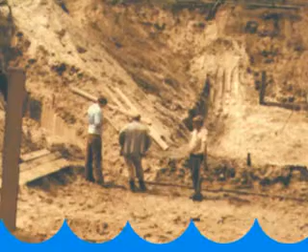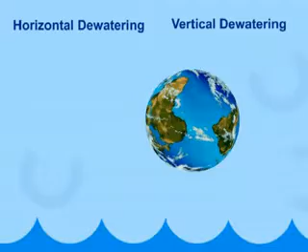At the end of the 70s, plans were made for constructing a workshop and an office on an industrial estate. This was the beginning of the international development of the Koop Group. Nowadays, the Koop Group is the specialist in Europe in horizontal dewatering, vertical dewatering, deep wells, environmental projects and pump

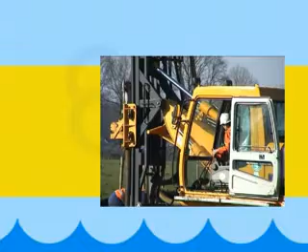installations. With the most up-to-date equipment and materials, the employment and coaching of professional specialists and continuous improvements by training, Koop has become a specialist in the complex area of dewatering and groundwater treatment.

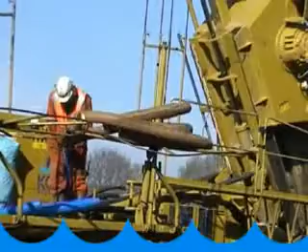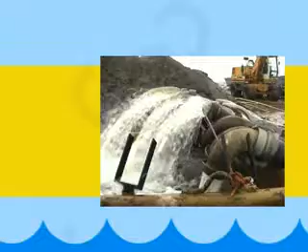Besides the professional aspects of the business, the Koop Group finds the safety, security, environmental and quality aspects very important. All activities are carried out with care and meet all possible environmental requirements. Therefore, the employees only work with the most modern techniques and the most safe equipment. The Koop Group in the Netherlands and Germany has international certificates such as ISO 9002, VCA and TUV.

The Koop Group operates in a number of countries, such as the Netherlands, Belgium, Germany, France, Turkey, Thailand, Sweden, Great Britain and Saudi Arabia. The Koop Group has several subsidiaries in the Netherlands and in Germany. The activities of the Koop Group are horizontal dewatering, vertical dewatering, deep wells, environmental projects and pump installations. Let's take a closer view.

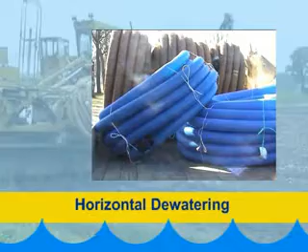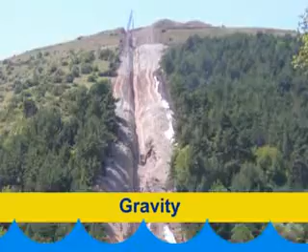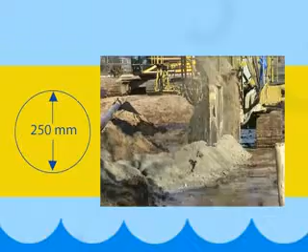Horizontal dewatering is an activity by which the water is extracted through drains. The extraction of groundwater can take place by gravity or vacuum. This dewatering method is mainly used for pipeline projects, or in the case of dewatering large areas. With the use of a drainage machine, Koop can realise multiple cable trenching, and it is possible to install flexible PE pipes up to a diameter of 250 millimetres. At the same time, the trench can be refilled with sand or gravel.

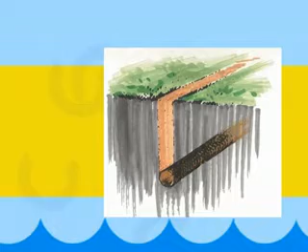The installation of cables and pipes in the trench is monitored by laser and can be placed at a depth of 8 metres below ground level. The drains are connected to a collector pipe underground, which ends in the pumping shaft. With specific adaptations to the drainage machine, Koop is able to install a vertical screen of geotextile into the ground up to a depth of 5 to 7 metres.

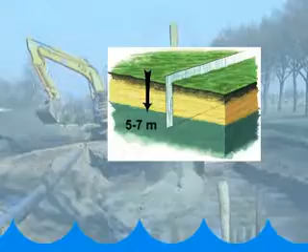The advantages of gravity dewatering are reduction of groundwater flow by 20 to 30%, reduction of costs for maintenance by 50%, reduction of costs for power supply by 50%.

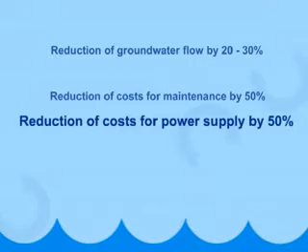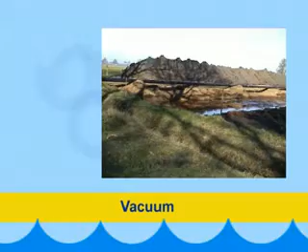Another possibility of horizontal dewatering is vacuum dewatering by means of drains. This system is mainly used for the construction of sewerage systems and for pipelines as well as projects for dewatering large areas. The installed drains are directly connected to the pumps. The advantage of this system is that there are no obstacles above ground on the construction site, and therefore there is no risk of damaging the dewatering system.

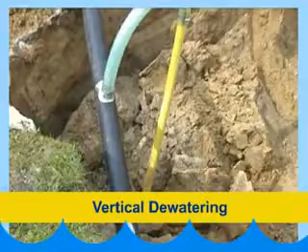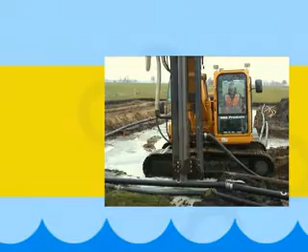Like horizontal dewatering, vertical dewatering can take place by using two filter systems, namely gravity filter systems and vacuum filters. Gravity filter systems are filters in which the water flows into the filters only by gravitation. With the use of drilling rigs equipped with flushing tools or hollow auger drills, 9 to 10 metres long, filters can be installed vertically or at an angle.

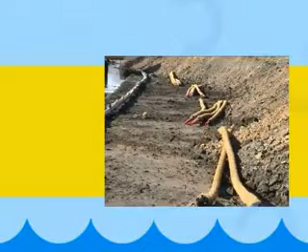The filter consists of a PVC drain protected by a coconut fibre. In this drain, a PVC tube is installed, which is connected above ground to the conduit pipes of the vacuum pump. Another system of vertical dewatering is the use of vacuum filters.

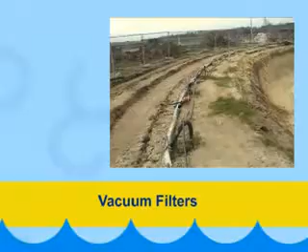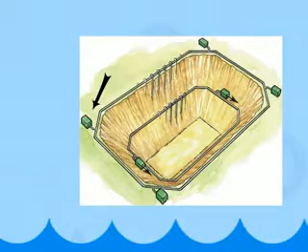Vacuum filters are PVC tubes of 4 to 7 metres long with a slotted section. They can be flushed in by hand or by flush boring using a drilling rig. Above ground, the filters are connected to a conduit pipe, which is connected to a vacuum pump. In this way, a vacuum will be created around the filters to stimulate the flow of the groundwater towards the filters. This system is mainly used in fine, sandy soils.

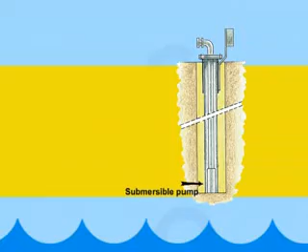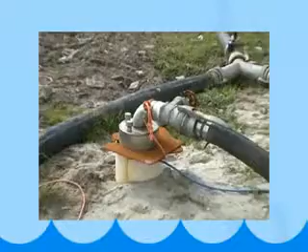Deep wells can be used for dewatering of large excavations. By means of a submersible pump, the water level can be reduced. Modern technology makes it possible to control the dewatering in detail by installing divers to record the reduction in water level automatically. With the use of specific software and frequency-steered pumps, the dewatering capacity can be controlled and, if necessary, adjusted. Advantages are the high reliability and the almost unlimited possibility of reducing groundwater levels.

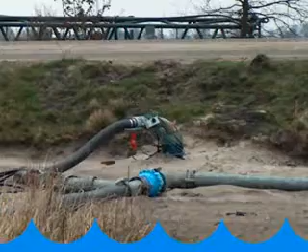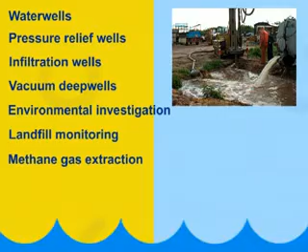We offer an extensive program for the construction of wells, namely flush borings, counter-flush borings, airlifting, auger boring, rotary drilling, and shell and auger borings. These techniques can be used for water wells, pressure relief wells, infiltration wells, vacuum deep wells for dewatering, environmental investigation, landfill monitoring, and methane gas extraction. Let's take a look at a few of these deep wells.

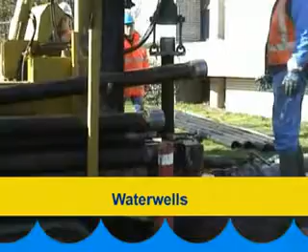Water wells. Deep wells used for water supply are mainly installed in the deeper layers. We have the extensive experience and various types of drilling equipment to realise these wells. The water is pumped up by means of a submersible pump or suction pipe.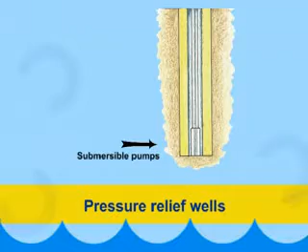Pressure relief wells. Pressure relief wells are used for the reduction of water pressure in layers underneath impermeable intermediate stratum. With the use of submersible pumps, the water pressure is reduced to an acceptable standard. In this way, it is possible to prevent bursting of the bottom of a construction pit.

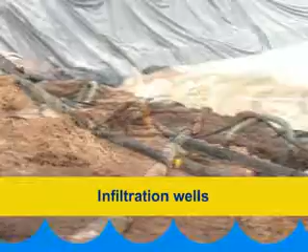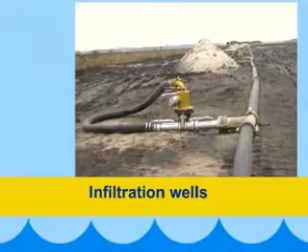Infiltration wells. We have a lot of experience with the infiltration of water into the permeable layers. Recent developments oblige dewatering companies to return the withdrawn groundwater quantities directly into the ground. For the infiltration of water, it is of enormous importance to have long-term experience, as the effectiveness of infiltration wells is influenced by many factors.

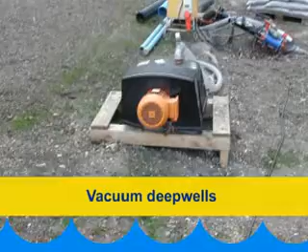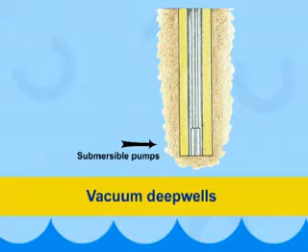Vacuum deep wells for dewatering. In low permeable soils, it can be useful to utilize a vacuum pump. This pump creates a low pressure inside the well to stimulate the flow of the groundwater into the well. With the use of a submersible pump, in combination with level devices, the flow will be automatically regulated.

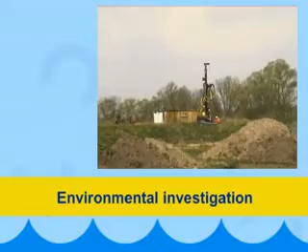Environmental investigation. When working in contaminated soils, the Koop Group has developed its own safety standards for drilling wells. The company has years of experience with cased boreholes to prevent cross-contamination in polluted soils. Preventative measures in combination with experienced drill masters guarantee a high standard product and safe execution of the works.

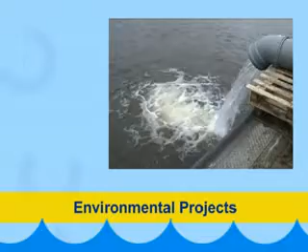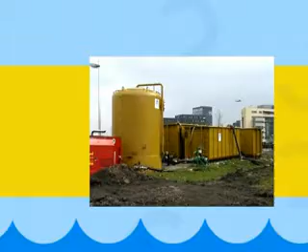Clean groundwater is of invaluable importance for the existence of the present and the future generations of mankind. For this, it is essential to use and treat groundwater with great care. In the past decennia, the awareness and care of the environment has been increased, not only in society but also within the Koop companies. The Koop Group can offer you a solution for tracing the contamination in soils and groundwater, combined with the ability to purify groundwater with the use of modern techniques.

Koop is a specialist in the field of boring for environmental investigations and the purification of contaminated groundwater. Koop can supply and install temporary water purification systems, such as oil separators, activated carbon filters, gravel and sand filters, iron filters, and oxidation.

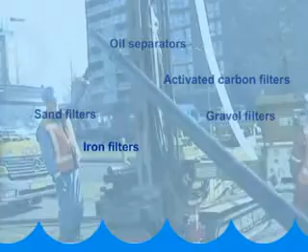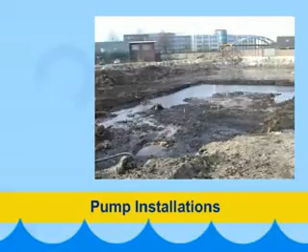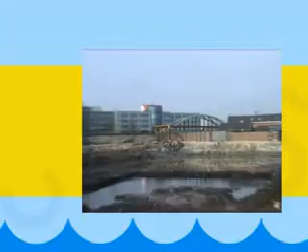The Koop Group offers you custom-made solutions for small and large pumping stations, for dirty as well as pure water. Here we profit from our modern machines and pump park, and most of all, our competent technical personnel. Koop offers you skilled and expert consultation in the area of pumping, from the technical solution to current cost estimates.

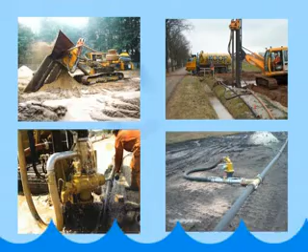As we have shown, the Koop Group can offer you a variety of dewatering techniques. But there is more. The service and delivery program of Koop offers a wide variety of equipment, which can also be employed on a rental basis. An example is our aggregates, which have a capacity of 25 up to 250 kilovolt amperes.